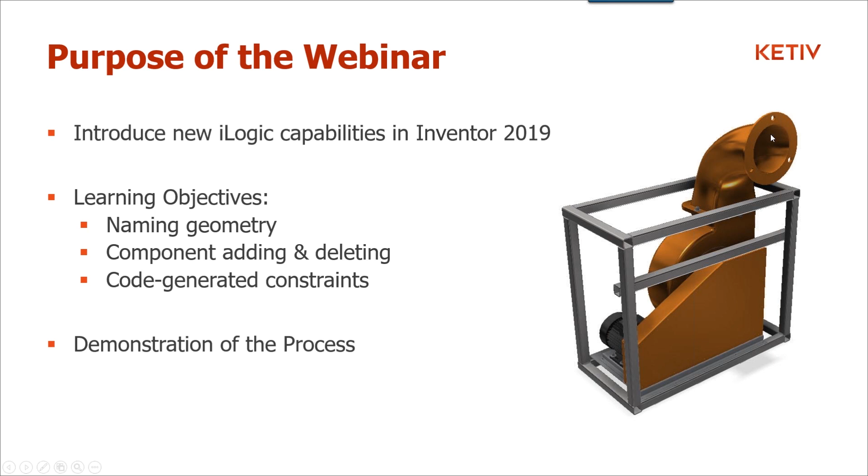Now, the demonstration that we're going to do is in the context of this industrial skid-mounted blower that you see on the screen. Specifically, we're going to be looking at this top part here - this outlet for the exhaust blower. We're going to give the user multiple options of different kinds of connectors they can use there. In fact, for our example here, we're going to have 8 different outlets that they can choose between. Now, they can choose any one of these 8 configurations based on 3 choices.

Their choices are that they can either have an outlet that is circular - you can see all of our circular ones over here - or rectangular, which are over on this side. They can also have outlets that are flange, which you can see here, here, here, and here, or they can have a clamp-based ending, which you can see here, here, here, or here. Or their last option is they can have it elbow, or they can have it straight.

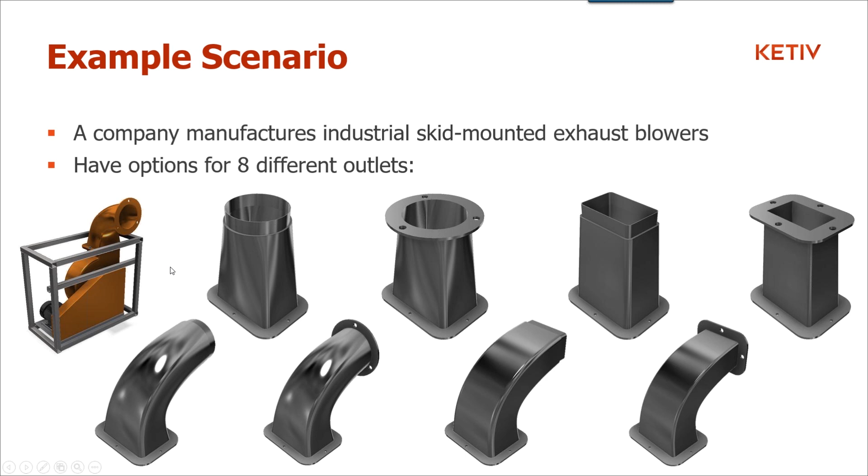So basically, we're going to give the user 3 different options, and based on which combination of those 3 options that they pick, we're going to go out and pick up the right part and load that right here so that they have the right outlet in their specific blower.

So we're going to do that with a few tools that are new to Inventor 2019. As I mentioned, the first thing that is new, which is actually really cool, it makes it very easy in code to reference faces instead of having to maybe create some work planes or other workarounds to get this to work. So really just by right-clicking any face, edge, or vertex inside of Inventor now, you have this new option called Assign Name.

When you click on that, a little dialog box will come up and it will let you name this face, edge, or vertex—anything that you want. I'm actually going to show how that works.

In conjunction with this new functionality of being able to name these types of geometry, inside of the iLogic browser they now have a new geometry tab as well. When you go in here and start naming a lot of different faces or edges, this tab shows all of the different edges, faces, or vertices that you've renamed. You can see that this glyph shows that this is a face, these are edges right here, and that is a vertex. So the glyphs make it really easy to tell exactly what you've named.

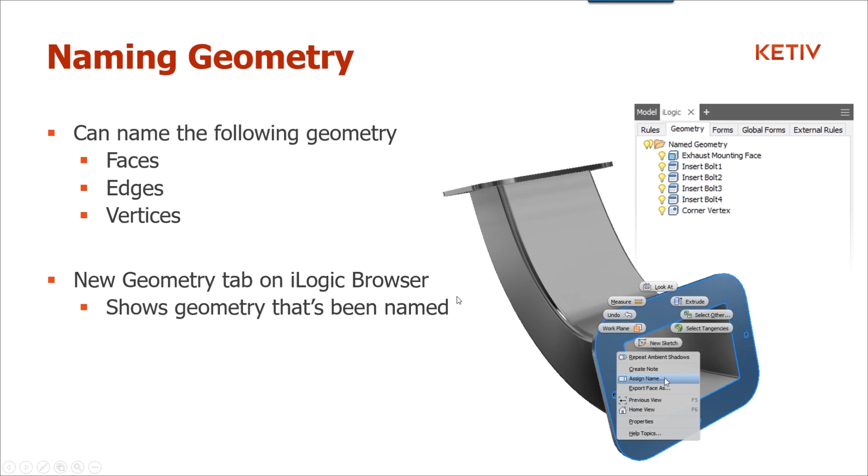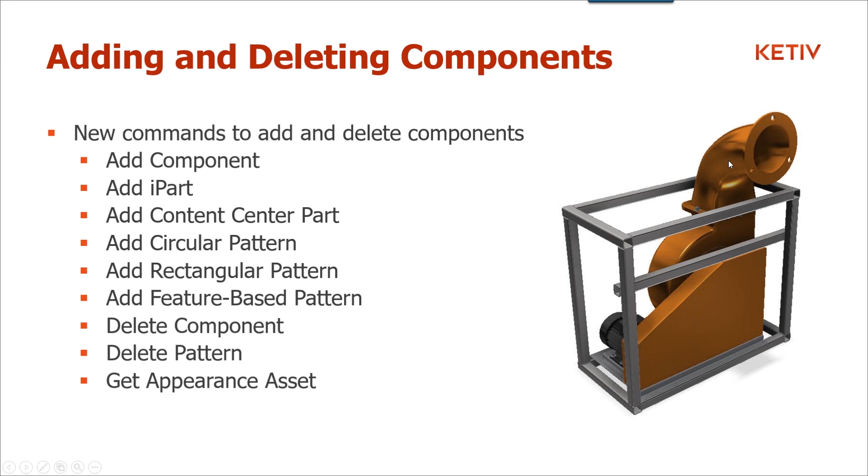The second thing we're going to look at, as I mentioned, is adding and deleting components. They have a whole bunch of new commands that let us add and delete components as necessary. We want to be able to add components, iParts, and content center parts. Through code, we can actually add a circular pattern, rectangular pattern, or feature-based patterns. We can delete components, delete patterns, and we can even get the appearance—so if a specific component is set to some type of appearance, we can get that, and we can set those appearances as well.

We're also going to look at constraints. There's some new code that lets you add iMates, angle, flush, insert, symmetry, tangent—all kinds of different mates or constraints that you would create manually. And we can also delete constraints.

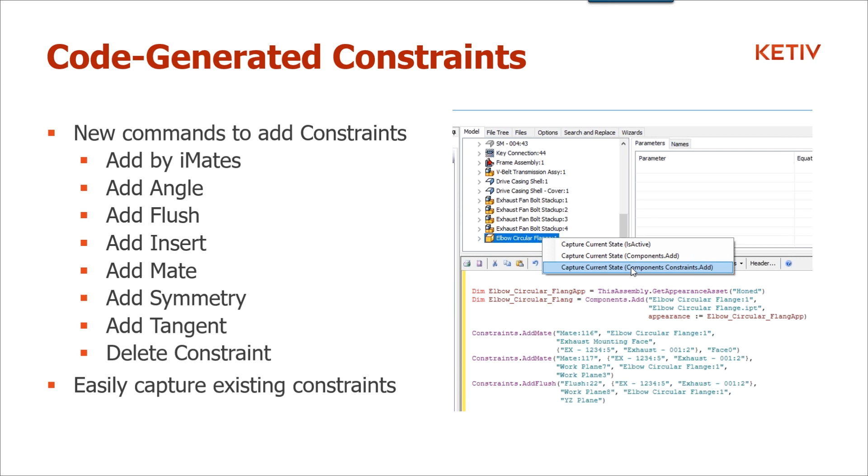They also made it very easy: if you have two parts in your assembly that are currently constrained together, you can right-click on that part inside of your iLogic interface, and there's an option to capture the current constraints. When you do that, it will actually generate those commands for you automatically. In fact, we're going to use that in today's demonstration so you can see just how easy it is to set everything up, grab the code from it, and then start making the changes so you can swap parts in or out as you want in your application.

So with no further ado, let's go over to Inventor now. Here you can see we have the assembly, and I have not yet attached the outlet that we're going to use for today's presentation.

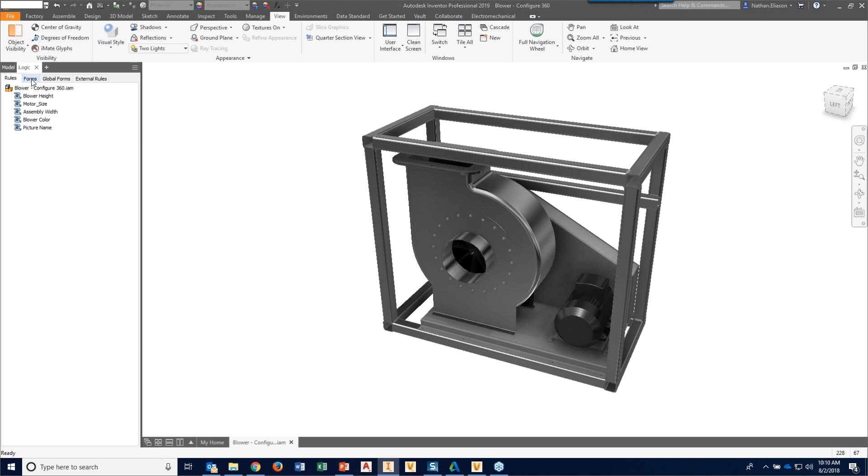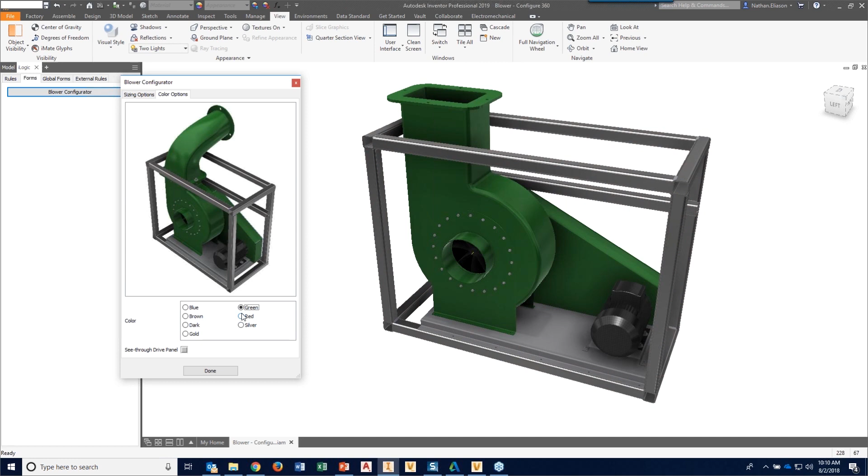I want to point out we already have some iLogic rules written here. If I come to my form right here, notice that I can change the height of my blower, and it will change that casing. I can also change the width of my assembly here. And if I come over to my color options, I have the ability to change the color and the look and feel of my part with what I have set up so far.

But now what we want to do is go ahead and add the outlet that we're going to be working on today, and automate that.

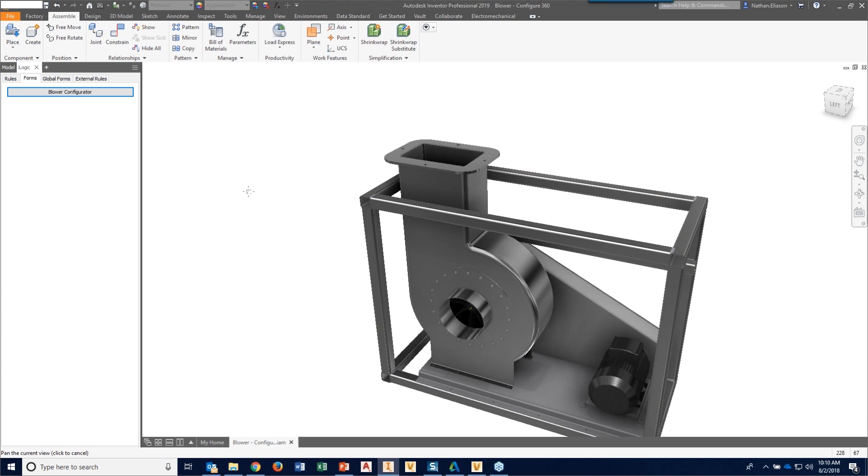First things first, I want to go ahead and open up the part that I'm going to show you how we can create names for. Give me a second here—I don't know what that is up there, it's hiding my open button.

We come right here, and I want to point out that we have all of these different parts representing the different components I'm going to be opening. This right here is the folder where I have all of these different end connections, and if I go down here, you can see my Windows Explorer preview updating as I go through these. Notice how I'm very consistent with my naming convention: on the left, it's either straight or elbow; in the middle, it's either rectangular or circular; and on the end, it's either a flange or a clamp type of connection. This is very important because we're going to use this to make it very easy to swap components in and out, and you'll see that here in just a couple of minutes.

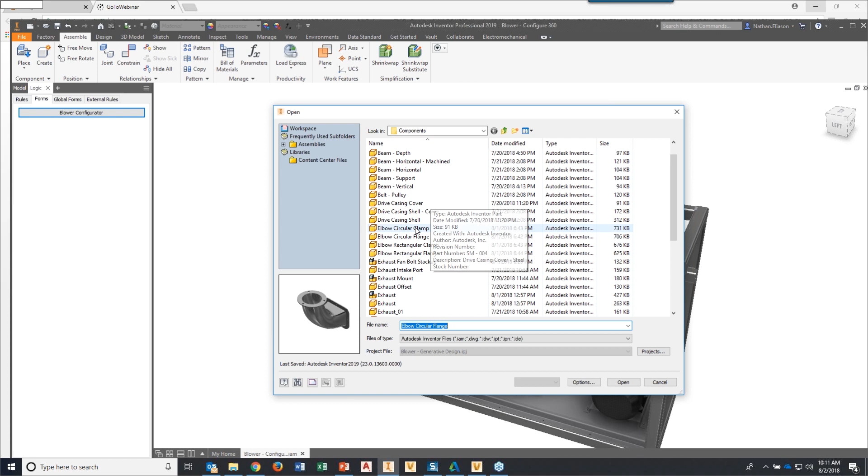So let's go ahead and start with our elbow circular flange. I'm going to open that up inside of Inventor.

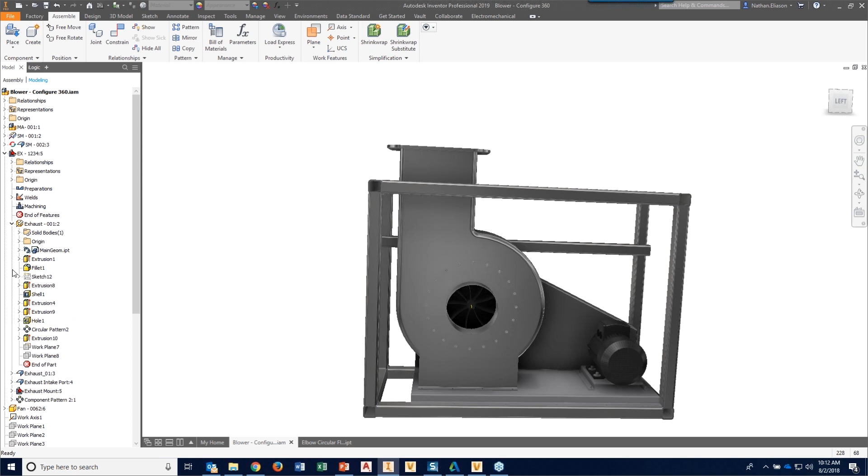When I open this, I have a couple of work planes that we're going to use to place this inside of the blower. If I come to my model and go to the casing, notice that we have two planes to locate it in that direction and that direction. But we want to make this face match with this bottom face right here, and notice I don't have a work plane there. So if I were writing code, how would I reference this?

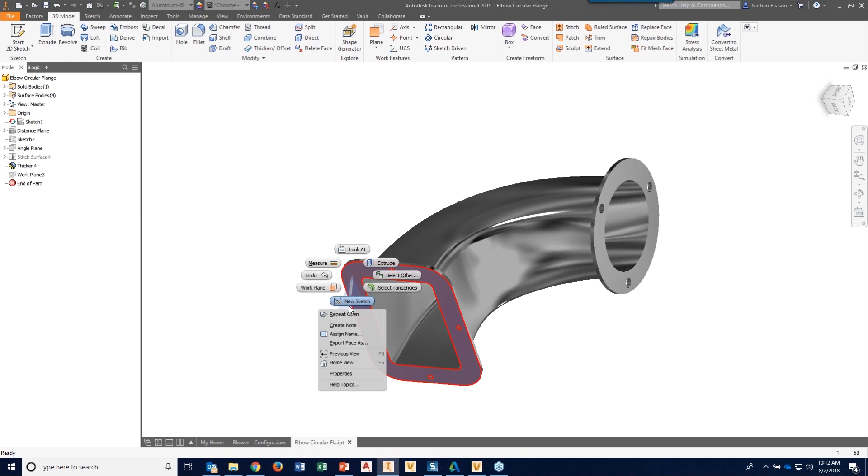Well, now with 2019, I can just right click this, and notice that we have this new Assign Name option in our context menu that you can open. I'm just going to go ahead and call this our exhaust mounting face. Now you get a nice little arrow that shows that we've named that face and it points to it.

As I mentioned, in our iLogic browser we now have this new tab called the Geometry tab. This will show, if I go through and name another edge or something else, all of the names I give to entities right here on this list. I can also right click and hide it so you don't see it.

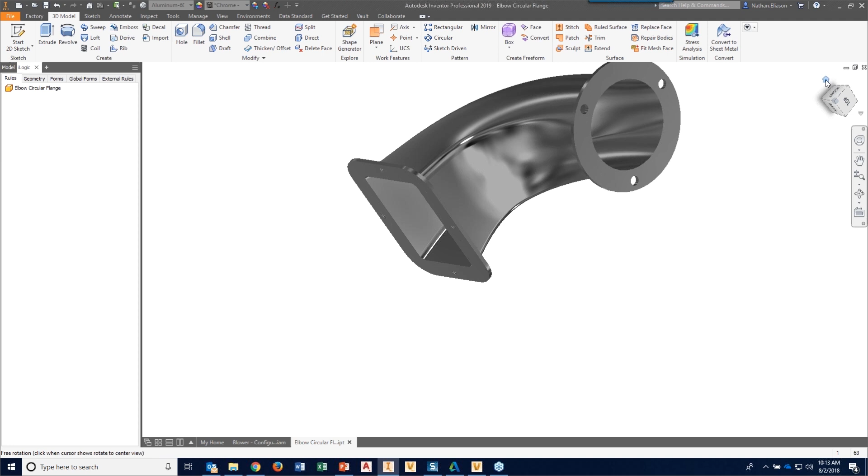So now that I've named that face, I'm going to go ahead and save this. And then we're going to go ahead and insert it into our assembly.

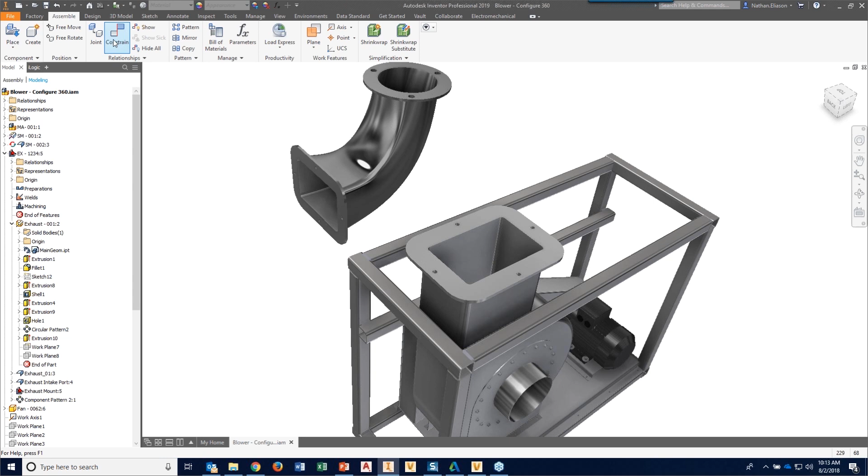So we come down here and we have our elbow circular flange, and I'm going to just use the standard Inventor constraints to place it. We're placing it for a reason, because I want to show how you can do this trick without knowing code, to simply go in and create the constraints with code that you need in order to make this work.

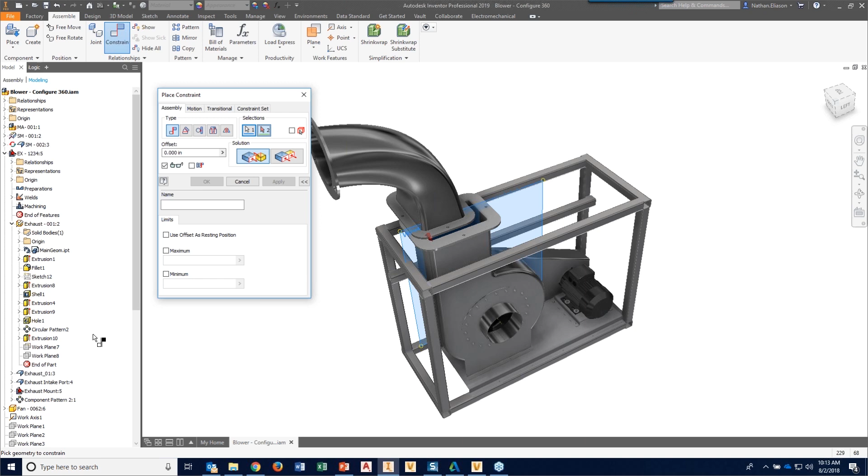Then what I'm going to do is go ahead and select the plane. We're going to go ahead and start aligning this as we need to, and click Apply. Then we just have one more quick constraint that we need to create. I'll do that pretty quick here.

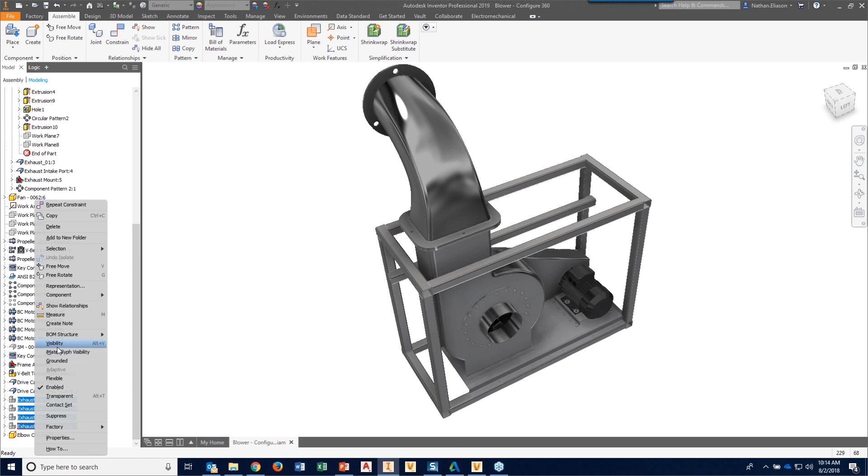All right, so now you can see we have this fully constrained. And if we want this to look a little bit better, I even have the bolts that we can go ahead and unhide here. So now you can see our part placed where we want it.

So the next thing we want to do is start writing code that lets us swap this in and out with any of those other connectors. But first, we need to build in a mechanism where the user can actually pick what options they want.

So I'm going to go ahead and create a few parameters. The first one we're going to create is our exhaust blower config parameter. This is important because it tells us what the current connector is that's open inside of our assembly. I'm going to set the default as elbow circular flange. Notice that what I typed in exactly matches what we have inside of our model tree and model browser, and it's very important that those two match.

I'm going to go ahead now and add some additional ones. We're first going to have exhaust fitting type. Remember that when creating parameters in Inventor, you can't have spaces, which is why I have all the underscores. The fitting types we can choose between are elbow or straight, so we're going to make that a multi-value list that they can choose between.

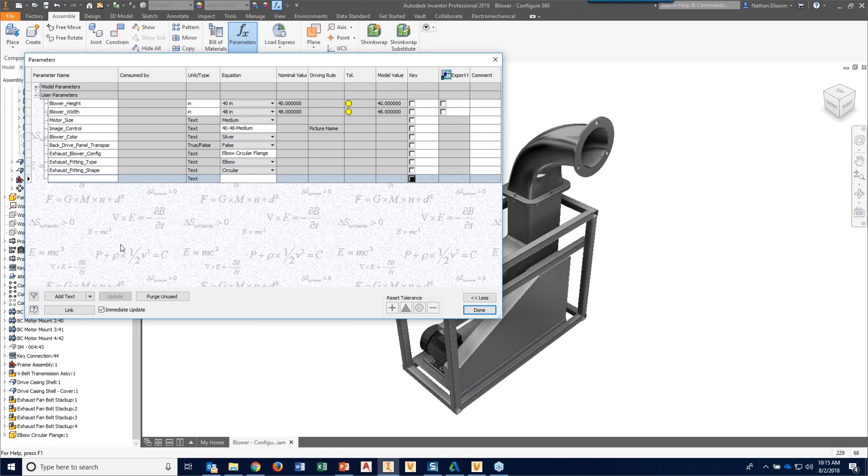Then we're going to create another one, this is going to be for our exhaust fitting shape, and this is going to have the options of being either circular or rectangular. Then we're going to create one more, which is our exhaust connect type, and this one we're going to have the options of making it either flange or clamp.

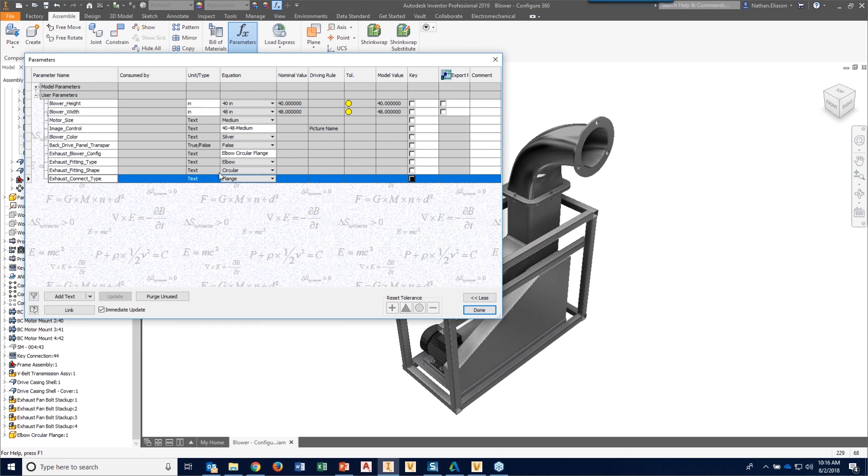Now, you can see here we have elbow circular flange, so I'm going to switch that to flange, and notice that now all of these options match here. Now, if I make changes to these right now, nothing's going to happen because I don't have any code that helps them know how they are supposed to change the model.

So now we're going to go to iLogic and we're going to create a rule. And the rule that we're going to create, we'll just call this our exhaust output connector.

When I bring up the iLogic interface, I want to point out that we have some new snippets available. If we come up here to assemblies and components, notice that we can add components, iParts, content center parts, patterns. We can delete components and parts.

We also have this other relationships option where we can add different types of constraints - angle, flush, insert, mate, symmetry, tangent, a lot of different types of mates. We can also delete specific constraints if you want, so if for some reason you want to delete one constraint and add a different one based on someone's options, those options are available, and it's very easy to do now with Inventor 2019.

So if I come down to my elbow circular flange here, I can right click this and I have a couple options. I can just capture the state to add it. What that does is basically just the code that would insert it - just like if I picked the place command inside of Inventor and picked that part and it just randomly put it in space, that's basically what that would do.

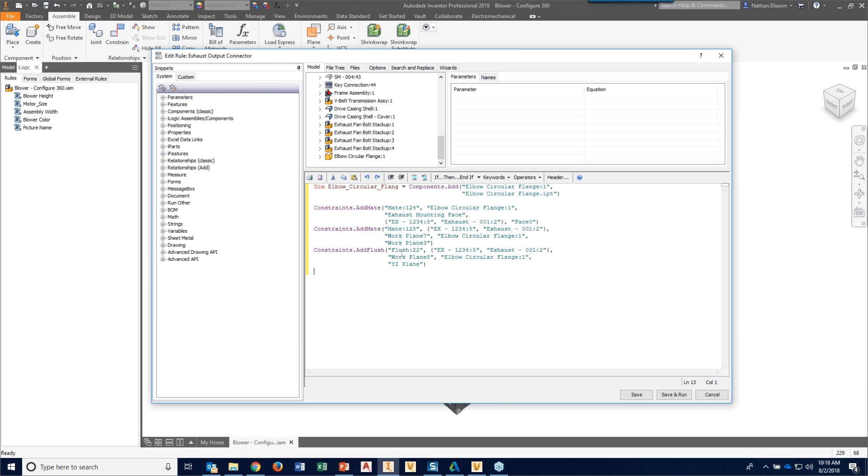But I also have the option to say also grab the constraints. And when I do that, notice that it grabs not only the part, but it knows that we added 2 mates and a flush constraint. So it knows that we added all of these constraints.

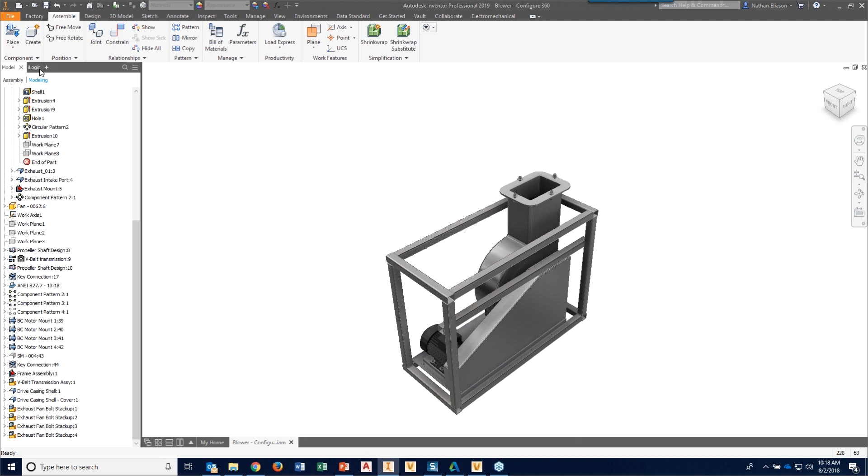Let's see what happens now when I save this. I'm going to go back to our model browser so we can see what's happening here, and I'm going to go ahead and delete this out. So I just now deleted that fitting that we had put in. When I go to iLogic and right click and say run this rule, notice that code brought it back into my session and created those same constraints again to put it right where I needed it to be. So pretty cool.

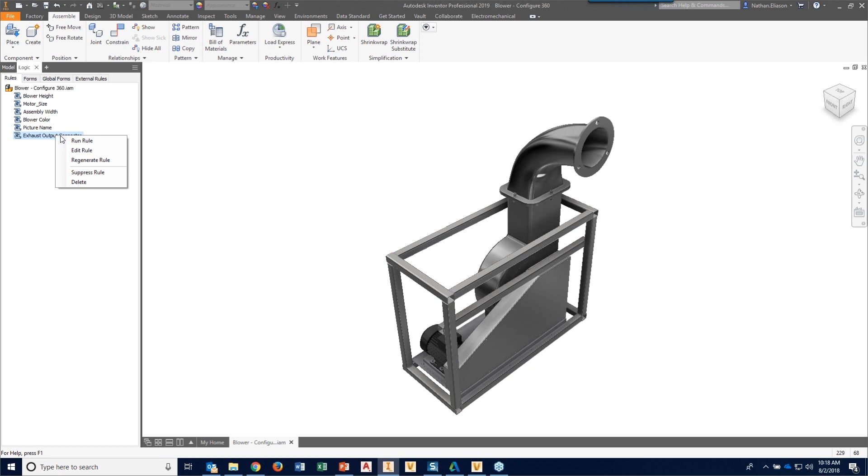Without really knowing any code, I was able to just come in, grab how that's placed, and then have the code right there for me ready to change as we need. So now let's go back and edit our rule again. That's pretty cool that we can do that, but just putting that same part in the same location probably isn't much value unless we can go through and start making changes to it.

So we're going to start adding some code here that will allow us to do just that. I'm going to pull up our user parameters so we can see these new parameters that I just created. We're going to first create 2 variables - one is going to store the CAD file name, and these are both just strings, and one is going to hold the component name. I'll explain what those are in just a second.

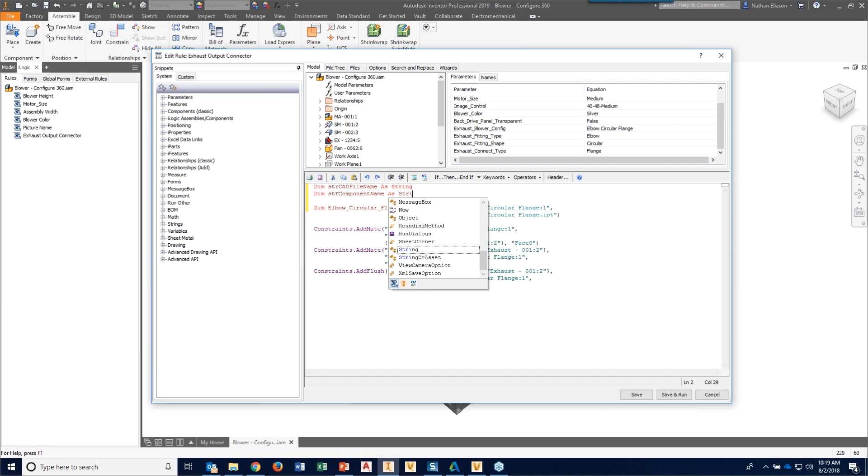Okay, so the CAD file name - if you look at this first line of code, this adds a component to our current assembly. Right here is the actual component name as it shows up in the model browser inside of Inventor, and this right here is the actual IPT. So this tells it what file to go out and find on disk and load into our current assembly session.

Because these are going to change based on what the user chooses, I need a variable that allows me to change these based on someone's selection. So we're going to do 2 things. First, notice that this exhaust blower config shows what our file name should be - you can see elbow circular flange matches this elbow circular flange. So when someone changes any of these fitting type, shape, or connector type, we want our exhaust blower config parameter to update so it matches whatever selections they have made. That's the first thing we need to do.

So right here, I'm going to double click this and it will bring it into my session. We're going to say that equals our exhaust fitting type, which is elbow. In Visual Basic, if you type an ampersand and then in quotes, that's going to put a space after that elbow - this is basically how you concatenate different pieces of information so it puts it together in a string. Then we're going to add the exhaust fitting shape, which would be our circular in this case, and add another space after that.

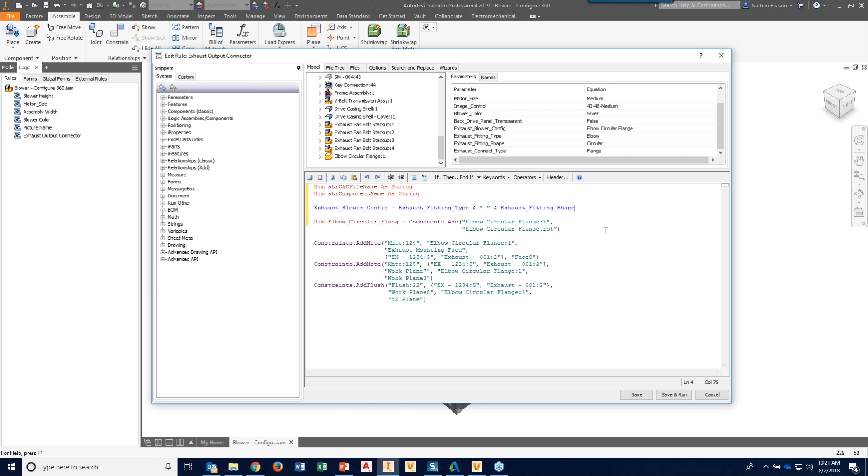And then we're going to add what our connector type is. So this code right here, after we make a change, it will run and update this to be whatever the new selection is that they've made.

Now, based on that, we want to go ahead and make the CAD file name whatever the exhaust blower config value is, but we'll also need to add the .ipt extension because that's an actual CAD file. It's an actual Inventor part it's going to go out and find, and we're going to need to load that into session.

Then we're going to create another variable, which is component name, and that's going to equal our blower config, but in this case, we're going to add a colon 1. And if you notice right here, you can see that it basically gives our component name plus a colon 1. That's how the components show up inside of the model browser inside of Inventor.

Yeah, it's like the first instance of the elbow circular flange. We're always only going to have one instance, so we can go ahead and keep that one.

So now I can go in, now that I have these variables set up, I can change this to be my string component name, and I can substitute this to be my string CAD file name.

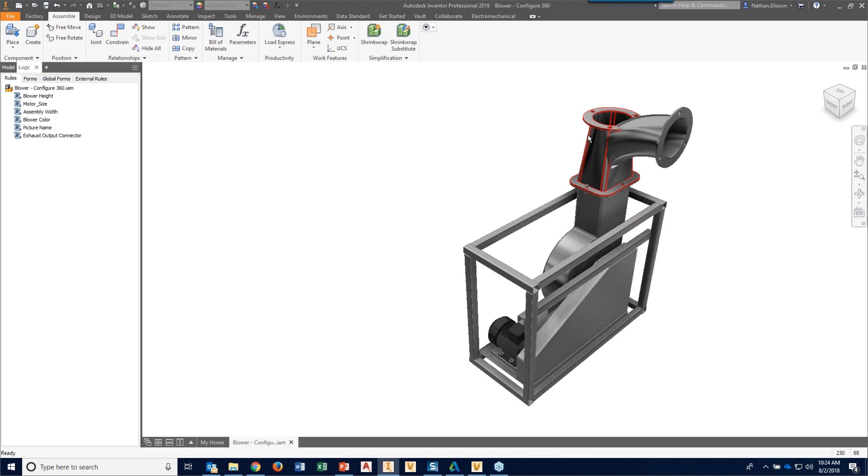Now notice, awesome, it created a straight configuration, but we have a problem. The problem is that we didn't tell it to delete the old one. We just told it to add a new one. And so if we kept running it, we'd have all these different components that would start stacking up on top of each other. So how do we handle that?

Well, I'm going to go ahead and delete the one that we don't need, because that was the old one. And we're going to go back to our code.

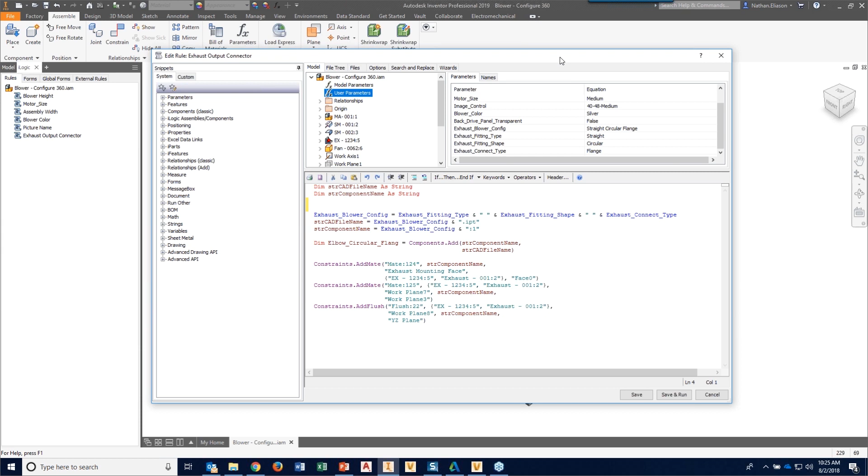And right here, before we make any changes, notice right now this exhaust blower config is set to the existing one that we have. So if I delete this before I change it, then it's actually going to delete whatever my current component is.

So I can go in here and say we want to delete this part. And the part that we want to delete is this. And then remember that we have to add the first instance. So now I told it delete straight circular flange instance 1. That's basically what I'm telling it to delete now.

So now let's save this. And now you can see it actually just ran it. So it deleted it and reinserted it.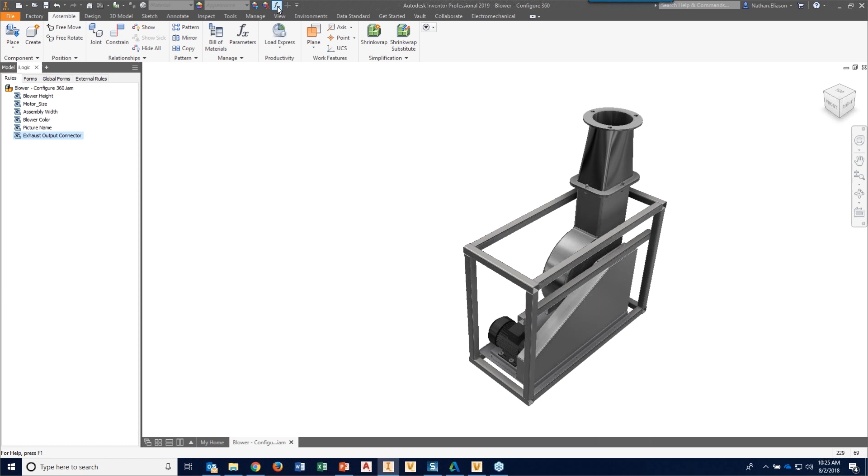But now no matter what I come and change, notice that it's going to delete the existing one and put the new one in. And so you can see how with just a very small amount of code, we were able to go in and make this completely configurable based on the types that you want.

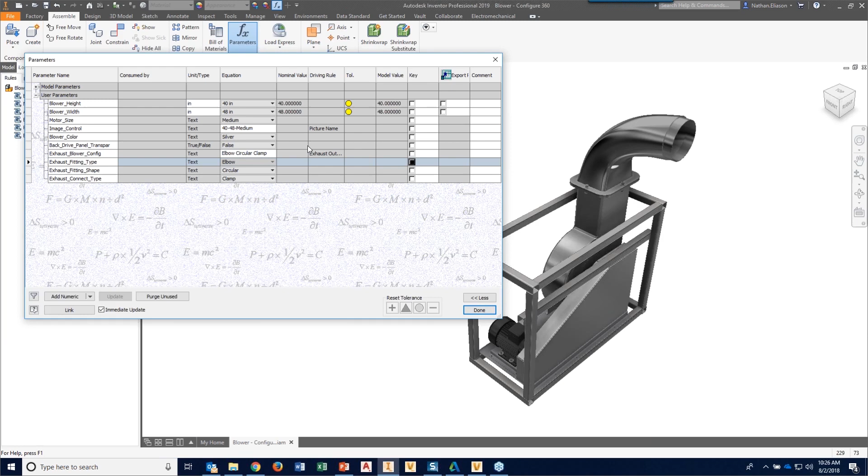So now, of course, if we wanted to, we could come in here and add this information to our form. So you can see I have my form right here. So if we wanted to, we could add another tab.

Oops, I put that the wrong place. Give me just a second here.

All right, we'll just put it right there. We can go in here and say that this is our output sizing options. And then we could go ahead and add these three options right here.

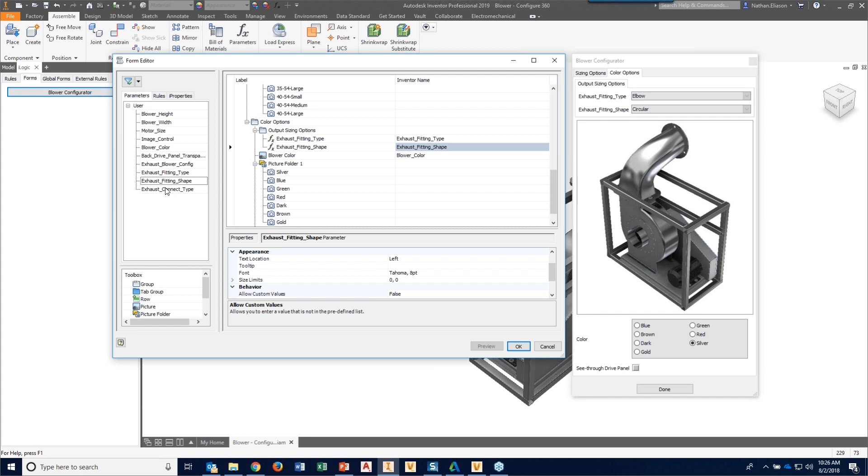Now just like that, when I open up the form, right from our form, we can go ahead and start controlling this. And notice that as we change the heights or anything else, it changes. Now, you will notice we have one issue.

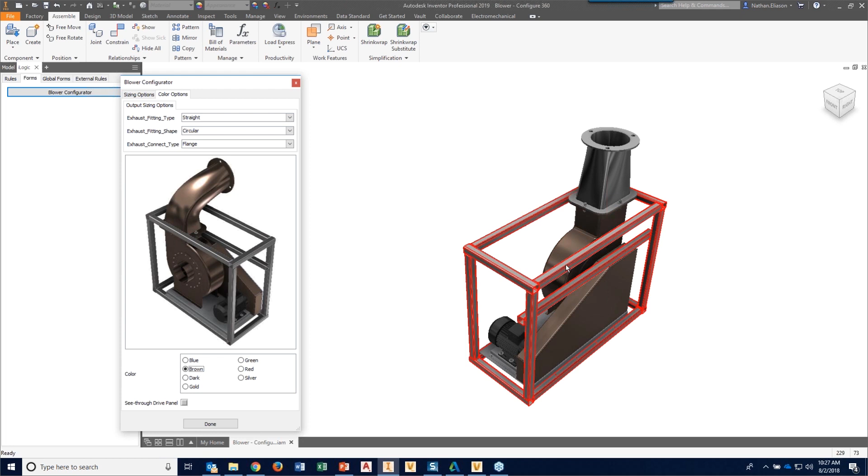If I go in and change the color, we haven't told it to change the color on this one yet. So if I wanted to finish this so it would change the color, I could go to my color rule, edit it, and right here, this is the code that actually changes the appearance of all of the parts inside of my assembly.

So I have this one that I had commented out. Again, I would do the same thing. I would come in, set that equal to my exhaust blower config variable, and then do my AND there. Have to hit the shift key there.

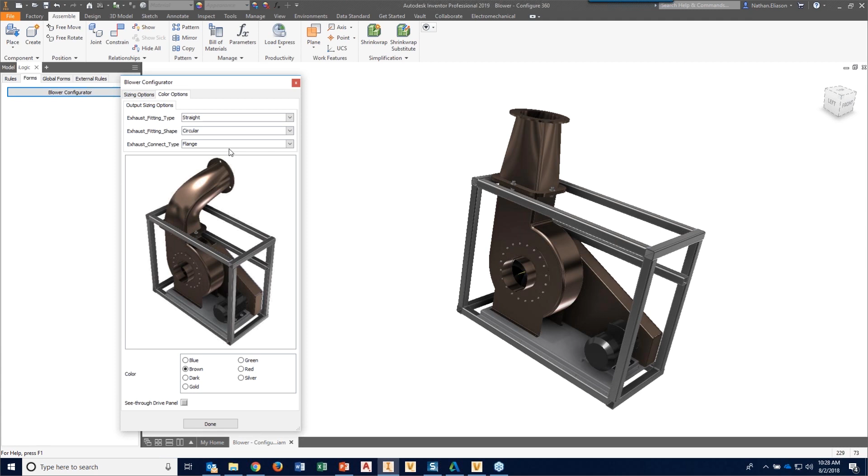And now when I do that, notice that as I make changes in my form, everything updates, regardless of whether I'm changing colors or sizes. All of my automation works exactly the way I want. And we were able to do that with a fairly small amount of code, because of the enhancements they made in Inventor 2019. I no longer have to really go through the API route if I want to use code to control inserting and placing components inside of my assemblies.

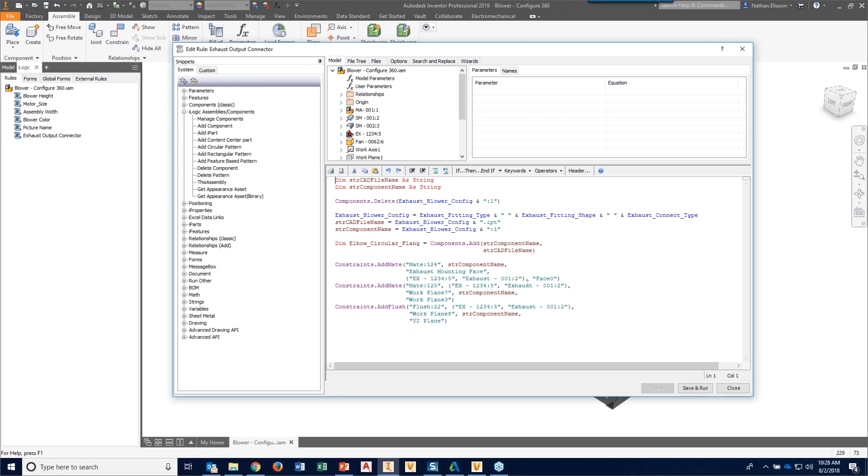So that wraps up the presentation we had for... oh, I'm sorry, I did actually want to show one more thing real quick. For any of you that use Configurator 360, I did load this, and it also works in Configurator 360 as well.

So we can go here to collaborate and say upload to Configurator 360. And before we do this, or while we're running through the options here, Nathan, can you give everyone who doesn't know what Configurator 360 is the 30-second tour, or explanation of what that is?

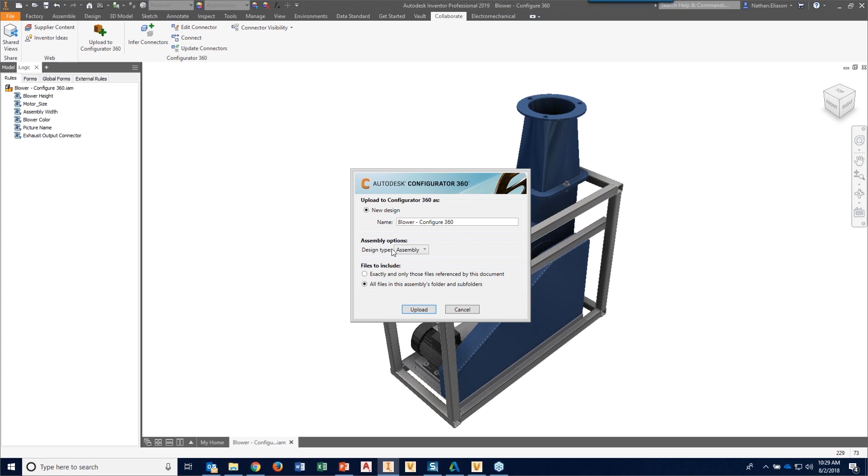Sure, I'll even give a shorter version than that. So Configurator 360 is basically a web-based user interface that Autodesk has made. It's a separate subscription outside of the product design and manufacturing collection. But what it does is it basically allows you to send a URL to a customer, and then your customers can click that URL, and it gives them a web interface where they don't need Inventor, they don't need any of that type of software.

Just through a web browser, they can go in and make all of those changes themselves. And as soon as this loads here, you'll see exactly what I'm talking about. So notice that right now I'm just inside of my Chrome browser, nothing special here. You can also customize this with your company logo, anything else you want to personalize and brand it to your own company.

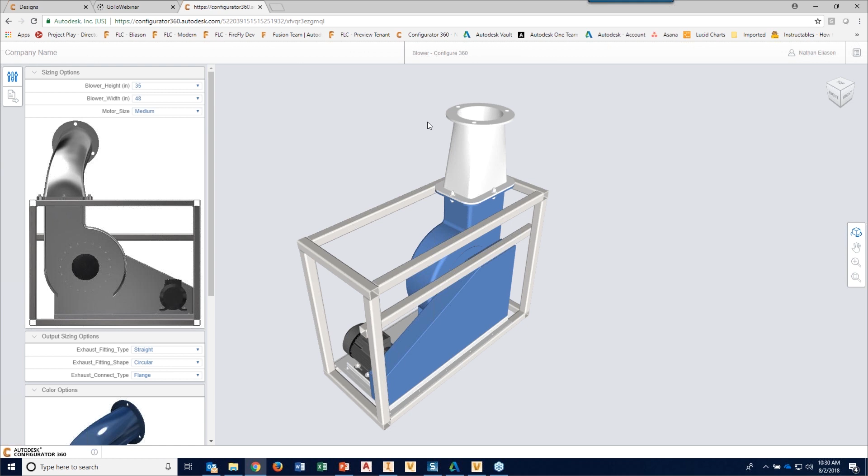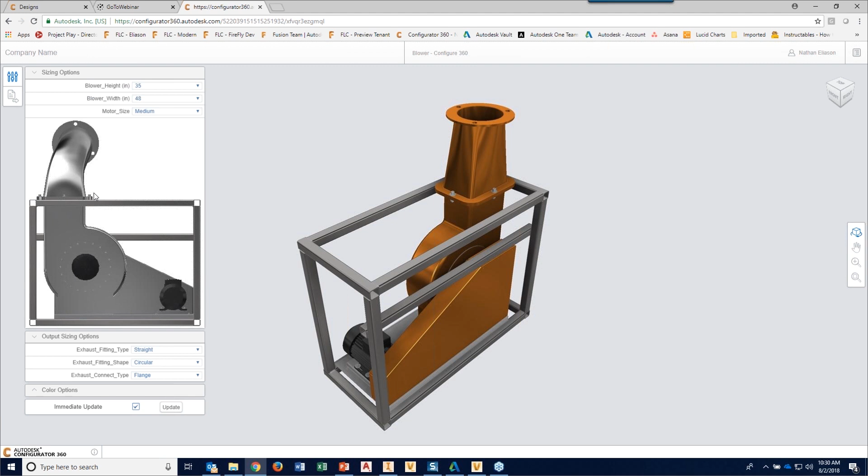What we can essentially do is come in here and notice that all of the information I had on my form is also available here. So if I wanted to change this back to, whoops, I wanted gold. So if I wanted to change the color to gold, I have all of my color change options there. I have all of my drawings here, or my pictures that I embedded into my form. And I can also come in here and make changes right inside of my application here.

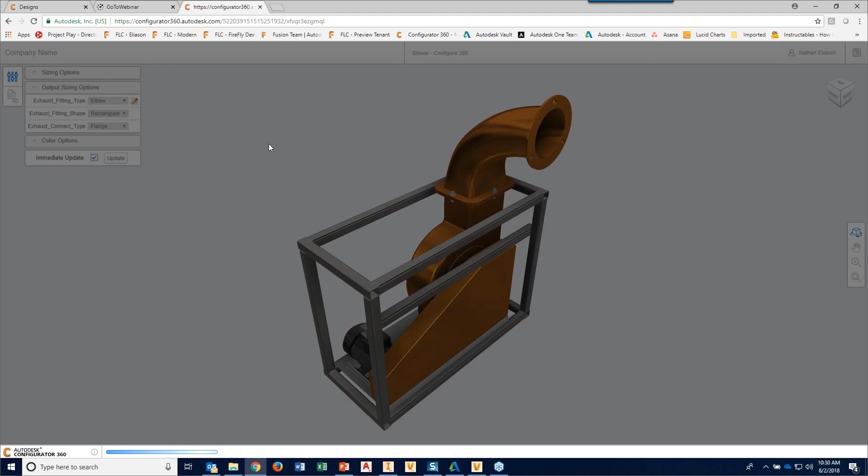So notice that even though I'm using code to take parts out and add new parts in, all of this works with Configurator 360, which gives you a really powerful way to deploy your solution once you get everything set up the way that you want, and have your customers directly use it themselves.